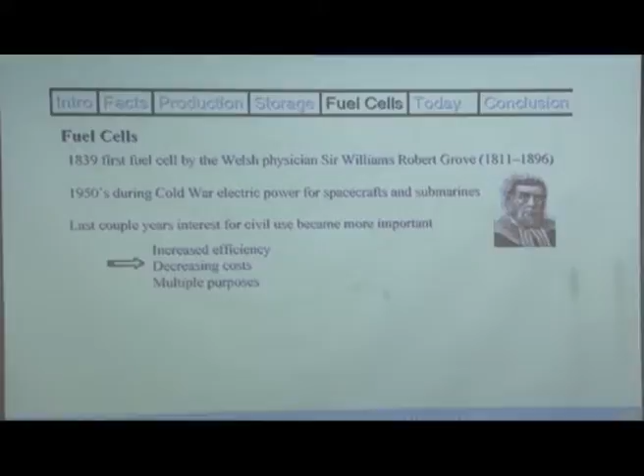In the last decade it became very important because the efficiency of fuel cells has increased and costs have decreased, and multiple purposes have been identified. One of the big pushes for the fuel cell is automotive application, because the automotive sector is so large worldwide. So now people are thinking that we can exploit this technology for this purpose.

What is a fuel cell? A fuel cell is just the reverse of electrolysis. In electrolysis, you have water, you put electricity, you generate hydrogen and oxygen. In a fuel cell, you take hydrogen and oxygen, you combine them, and produce water and electricity - exactly reverse. So it converts hydrogen and oxygen into water and electrical current.

The benefits are that it is a highly efficient process, 40 to 50% efficiency. It does not have noise, there are no emissions of any GHG gas, which will reduce the dependence on fossil fuel.

This is one commercial stack of General Motors. General Motors is at the forefront of developing fuel cells for automotive applications. So this is one such module that has been made by them. There are a few components that I would like to draw your attention to.

Basically, this purple thing in the middle is called PEM, proton exchange membrane. It is a polymeric electrolyte, basically a polymeric film, and on both sides you have anode on one side and cathode on the other. So from one side hydrogen gas flows, from the other side air or oxygen flows.

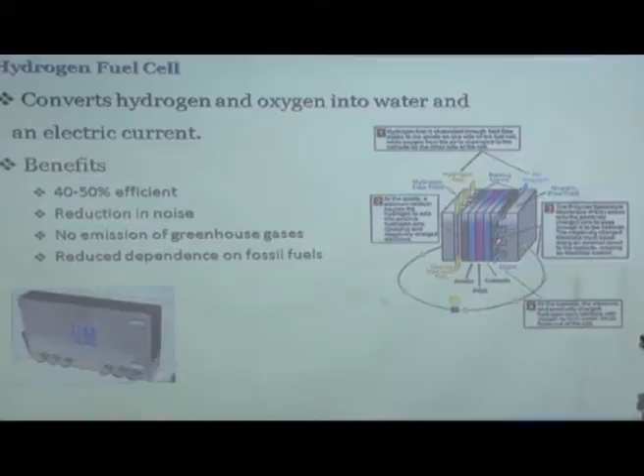Water gets collected, it gets frozen, and once it gets frozen, it will stop the flow. If it stops the flow, everything will stop. So cold temperature performance of the fuel cell is a big problem. It needs some artificial heating, so that the water can remain in liquid form under low temperature ambient conditions. So this is one of the limitations.

Again, this shows here the hydrogen is split into proton and electron. Electrons go out, protons pass through this membrane, come here, and then the electron comes from outside, oxygen is coming - this is also a platinum catalyst - and here water production takes place.

So there is one set of these 5 layers, it is called one stack. It produces about 1 point some volts and maybe about 1 ampere of current, or depending on the size, the ampere can be more or less. So depending on how many volts you want, how much power you want, you make stacks - stacks meaning 1 set, 2 sets, 3 sets - and you put them in series, and then the voltage will increase.

The problem is that one fuel cell is about 1 point some voltage, so it is a very low voltage. The solution is that you stack several fuel cells together, and that way you increase the voltage while keeping the current constant, or if you put them in parallel, the current will also increase.

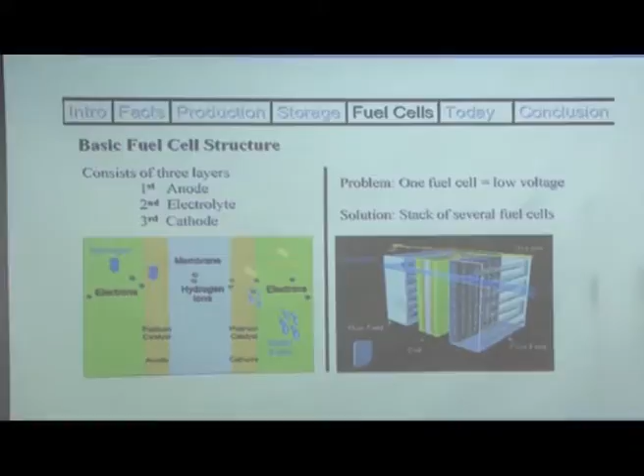So basic chemical reactions are hydrogen plus oxygen gives water. In principle, hydrogen is split into proton plus electron, and at the anode, electrons travel from the anode to cathode, and this is called electric current. When they reach the cathode, they react with oxygen to give O minus ion, and at the cathode O minus combines with the proton coming via the PEM, forming water.

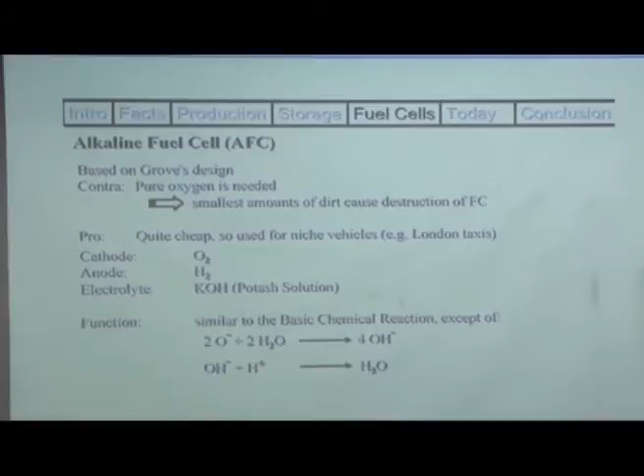Then there are several other types of fuel cells. I think I will skip this since you have understood fuel cells, but I will just mention that there are alkaline fuel cells, where the electrolyte is alkaline, and proton exchange membrane fuel cells, which is the one we just discussed. Then there are phosphoric acid fuel cells, where the electrolyte is phosphoric acid, and many other types like molten carbonate fuel cells, etc.

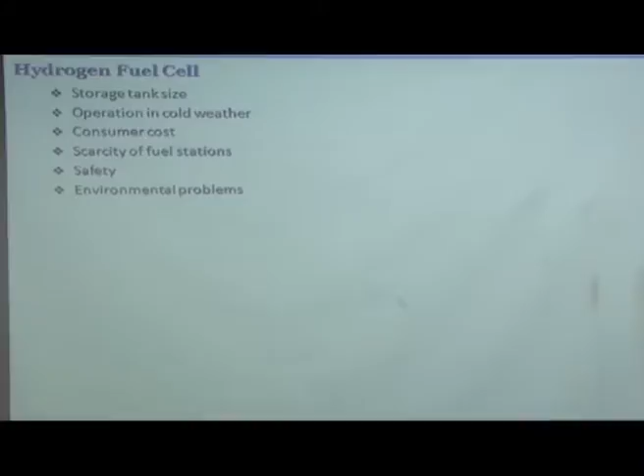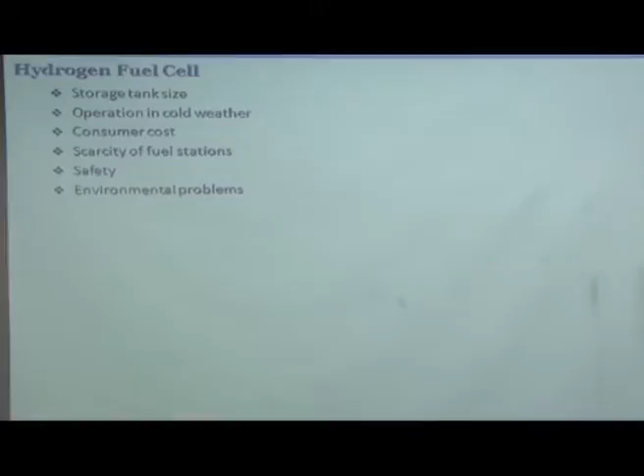When using hydrogen fuel cells, the challenges are: first, tank size, how do you store hydrogen and at what pressure. Second, operation in cold weather, because freezing of the water into ice will take place. Then the cost is very expensive, because you are using platinum catalysts to split hydrogen into proton and electrons, so the cost is very high. There is also a big scarcity of hydrogen fuel stations worldwide, safety concerns, and environmental problems with the materials used in hydrogen fuel cell production.

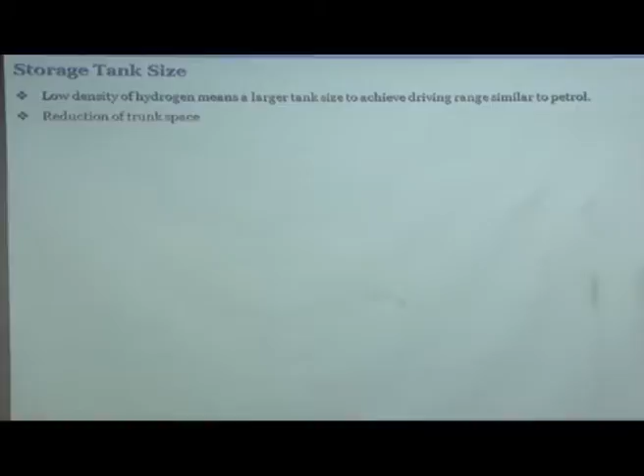Tank size: low density hydrogen means you have to have a higher fuel tank size to achieve a driving range similar to petrol. So if you have bigger tanks, in spite of high pressurization, this will lead to a reduction in trunk size. You will be able to put a lesser number of suitcases in the trunk, very small space will be available.

Cold weather: the fuel cell contains water for humidifying the fuel cell and as a byproduct of the reaction, and the fuel cell needs to reach a critical temperature for full performance. So under low temperature, its performance is always suboptimal.

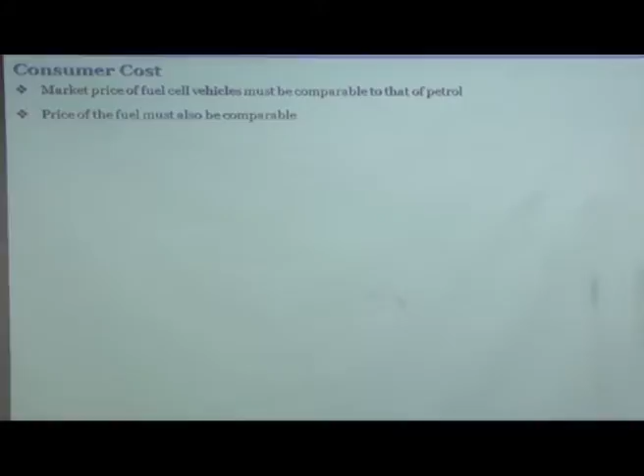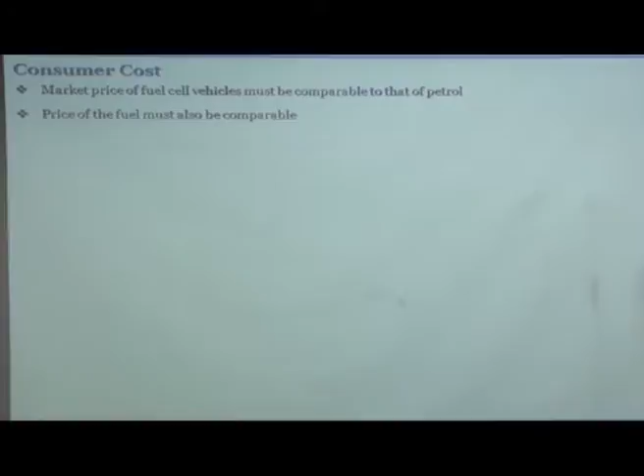Consumer cost: a fuel cell vehicle must be comparable in cost to petrol vehicles, but right now it is about 100 times the cost, making it very expensive. The price of the fuel must also be comparable, only then will a normal customer like you and me buy it. If you are a Hollywood star, of course you do not care about cost, it is more of a fashion statement, and that is what is happening right now. Most Hollywood actors have fuel cell powered cars because when they go to shows, they can show it off. But its penetration in the market for common people is very, very low, because right now it is not really value for the money, though technology keeps evolving.

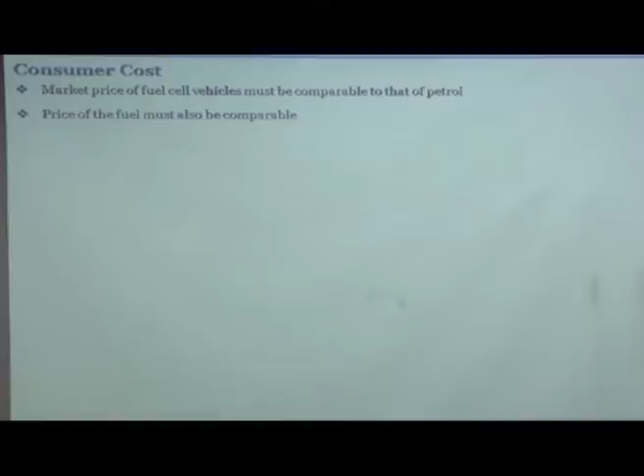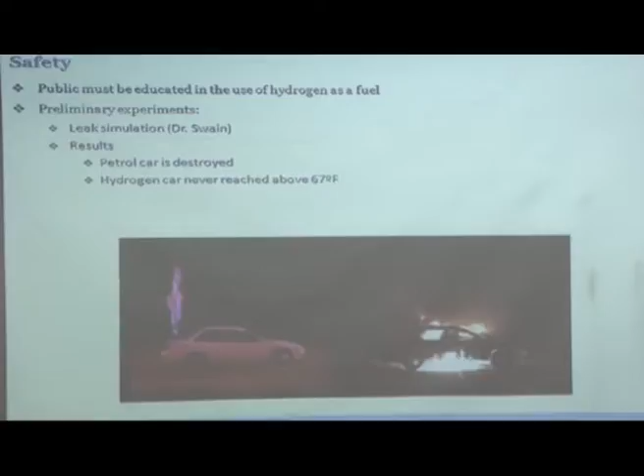Now, the safety issue. I will show you these two cars. The public has to be educated. Right now, safety concerns with hydrogen are more a matter of ignorance, people are not aware of its properties. Once people are made aware of the properties of hydrogen and how safe or unsafe it is, they have to be educated. For example, let me ask you, do you feel fear when you sit in a petrol fueled car about it catching fire or something like that? No. Now here are two cars given. Which one is the petrol car?

This one. What does it show?

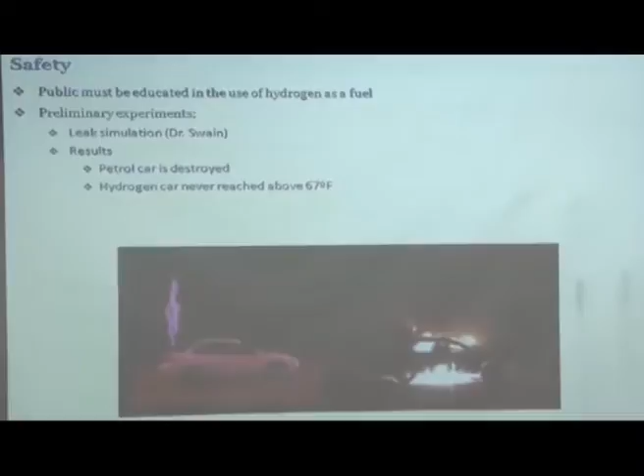So it was a leak simulation test conducted by Dr. Swain. One was a petrol car, the other a hydrogen car, and in both the fuel was deliberately leaked and ignited.

So you can see, if you are sitting in such a car, in no time you will be like Kentucky Fried Chicken. You will be dead, okay.

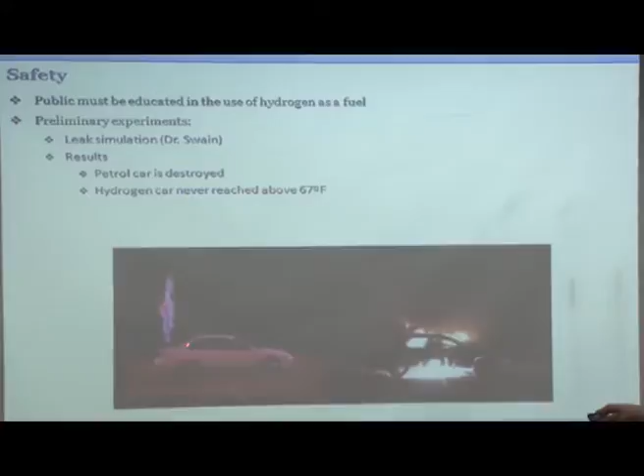Now this is the hydrogen car where the leak is there, but hydrogen has very low density, it rises up very fast, and it has almost invisible flames. The radiation is what causes deaths in fires, because lot of soot is produced, flames become visible and radiate heavily. If the flames are not radiating, nobody gets burnt. Here you see the flames are not radiating, and inside the cabin the temperature never reached above 67 degrees Fahrenheit. You may feel a little hot within tolerable limits, but you will be safe, extremely safe.

So hydrogen is extremely safe, provided you know how to handle it. But if you are inside an enclosed room where there is no place for the hydrogen to escape, of course it will kill you.

When electricity was first invented, with the dynamo, people were so scared, wondering what kind of technology had been created that could give you a shock. Now you are not scared to ask your 3-year-old son to switch on or off a fan or a light. It has become so safe. So people have to be educated about the safety of hydrogen. But there are some historical reasons too, which I will talk about a little later.

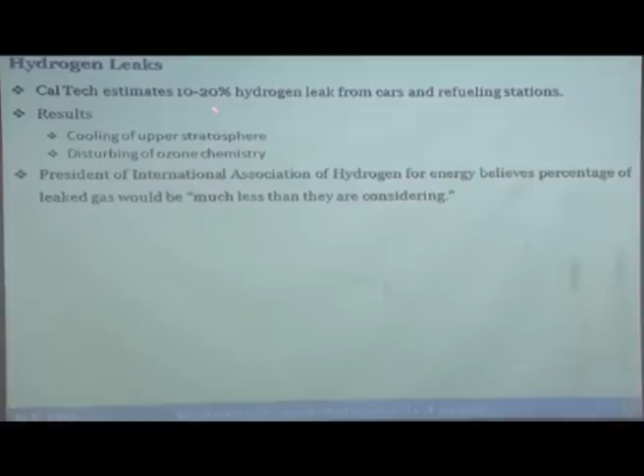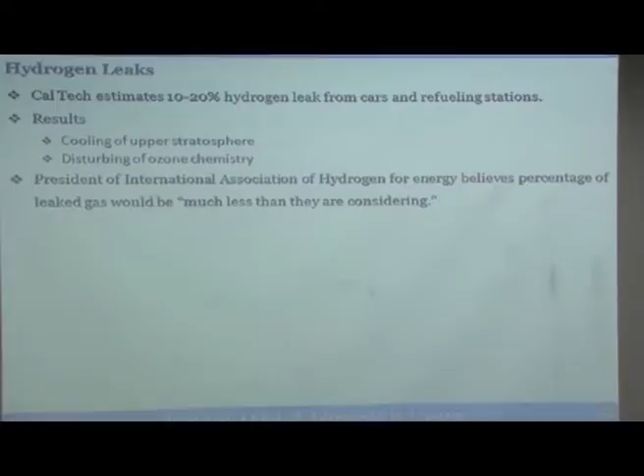Caltech estimated that 10 to 20% hydrogen leaks from cars and refueling stations will take place. This happens because hydrogen is a light material with small molecules that may penetrate through the tank. When they rise into the atmosphere, they may lead to cooling of the upper stratosphere and disturb ozone chemistry, if implemented at a very large scale for the entire transport sector.

But the president of the International Association of Hydrogen Energy believes that this 10 to 20% figure being talked about will be much less than what they are considering. So there are debates about the environmental impact as well.

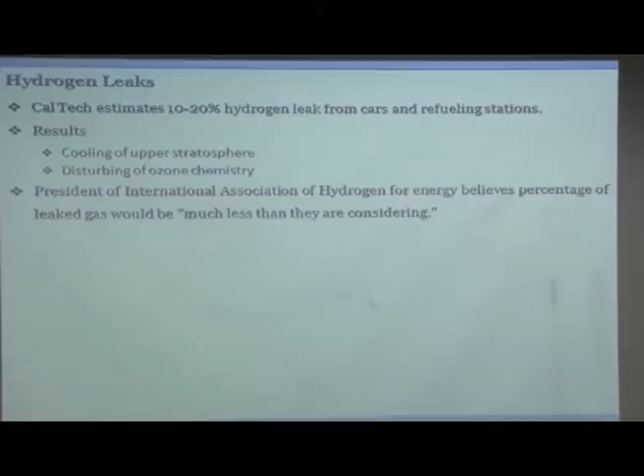Two types of hydrogen engines exist: a fuel cell or a hydrogen IC engine car. The main difference is that fuel cells are more expensive and hydrogen engines are cheaper. So if you want to afford one right now, you can afford a hydrogen IC engine car. Maybe 10 years down the line, if you have a very successful startup and make a lot of money, you can buy a fuel cell car. But right now, maybe go for a hydrogen IC engine car.

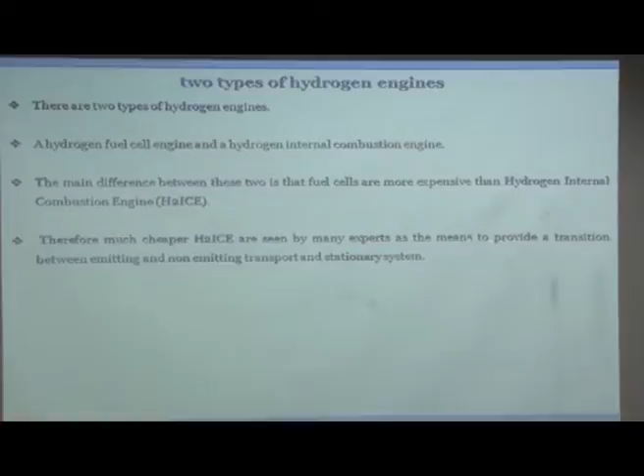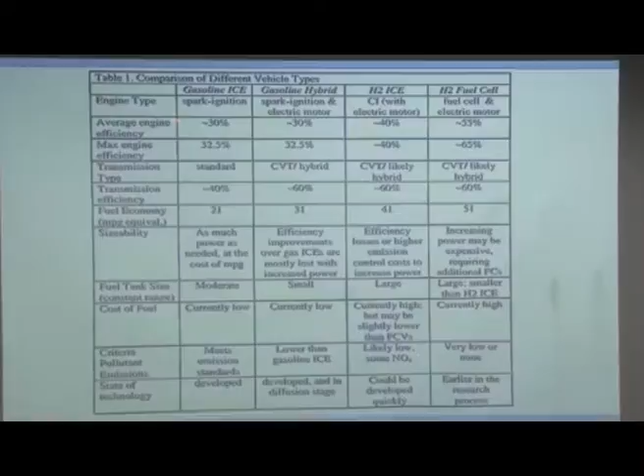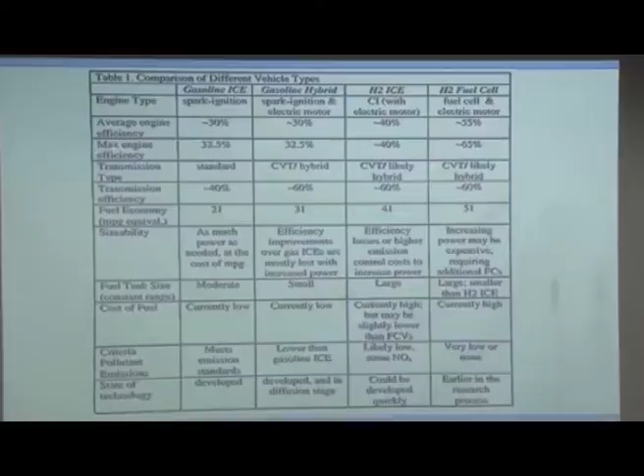Therefore, much cheaper hydrogen IC engines are seen by many experts as the means to provide a transition between emitting and non-emitting transport and stationary systems. This gives a comparison between different types of vehicles - gasoline IC engine, gasoline hybrid, hydrogen IC engine, and hydrogen fuel cell - across parameters like engine type and average efficiency. You can see hydrogen IC engines are more efficient than both gasoline types, but fuel cells are even more efficient. Maximum engine efficiency is highest for fuel cells, transmission efficiency is good, and fuel economy in miles per gallon equivalent is poor for gasoline IC engine, much better for gasoline hybrid, even better for hydrogen IC engine, and best for fuel cell.

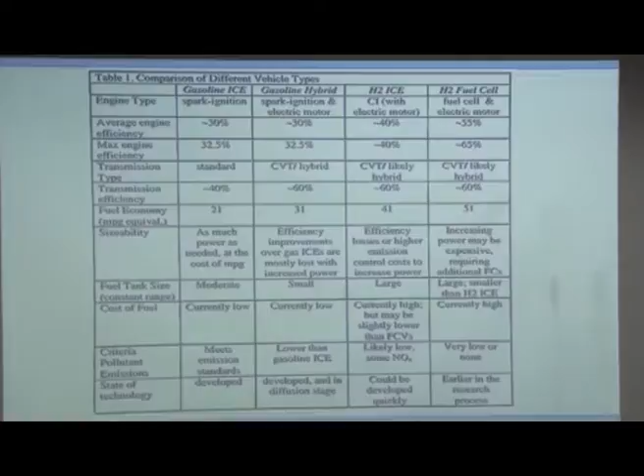Now let us look at the configuration of the fuel cell vehicle. You have fuel, which is hydrogen in this case, and the fuel cell generates electrical power, which then goes to the power conditioner that charges the batteries.

So, electricity will flow between the battery and the power conditioner depending on whether the need is more or the production is more, and then from the power conditioner the electricity is provided to the accessories, and then it will also be given to the drive motors.

Drive motors work both ways. When you want to accelerate, it will drive the wheels. When you are braking, the drive motor acts like a generator and generates electricity which is finally stored in the battery. So regenerative braking is one of the big plus points of such vehicles. This is the basic vehicle configuration at a very high level.

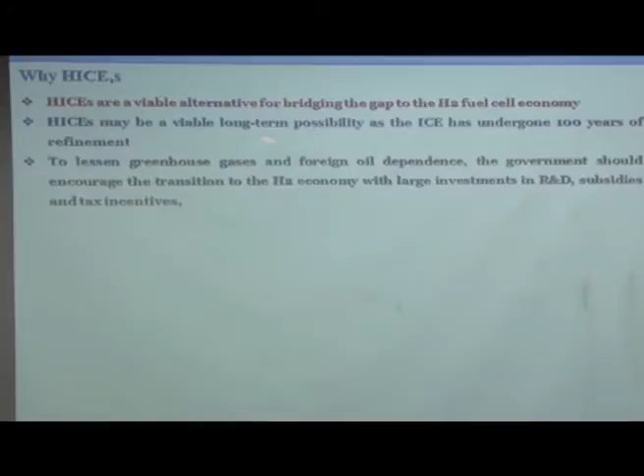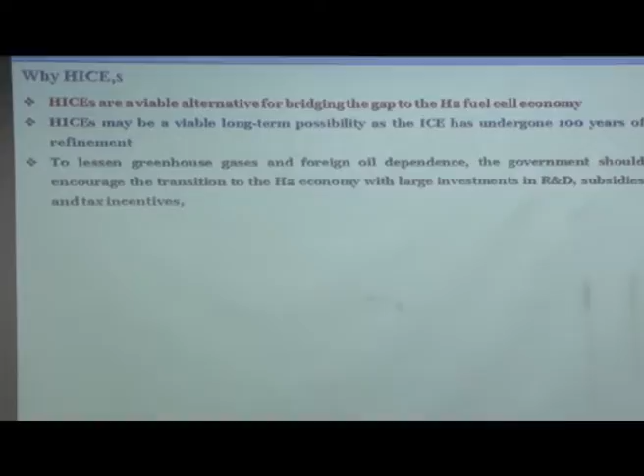Hydrogen IC engines are a viable alternative for bridging the gap to the hydrogen fuel cell economy, and hydrogen IC engines have gone through 100 years of refinement. We basically want to reduce dependence on foreign oil and greenhouse gas emissions. Therefore, a lot of incentive is being given to develop hydrogen fuel vehicles all over the world.

Some history: electrolysis was first done in 1800, then hydrogen IC engines were proposed even before other IC engines were developed, in 1820. In 1874, Jules Verne wrote a novel where he said that hydrogen, or water, would be the coal of the future.

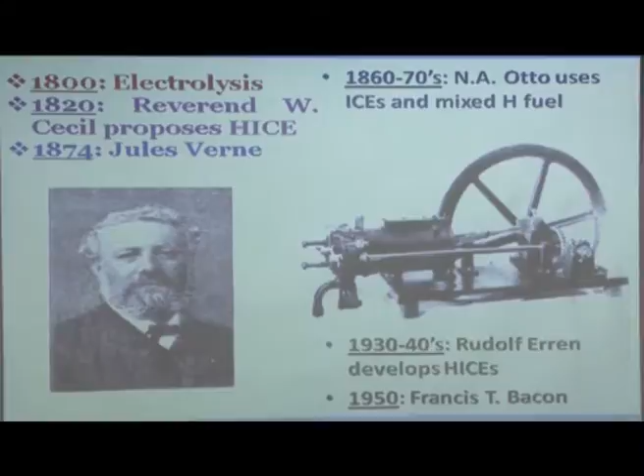In the 1860s and 70s, Nicholas Otto used an IC engine mixed with hydrogen fuel. There was an accident when he was using this, and he almost died. He was very badly injured in that accident with hydrogen fuel.

In the 1930s and 40s, Rudolf Erren developed the hydrogen IC engine successfully, and there was a lot of work done by Francis Bacon in the 1950s.

Everything was fine, a lot of work was being done on hydrogen, people were running and developing hydrogen engines, and people were flying zeppelins, airships, between Europe and America, all fueled by hydrogen as well. Hydrogen was not a taboo at that time, but then one fine day Hindenburg happened.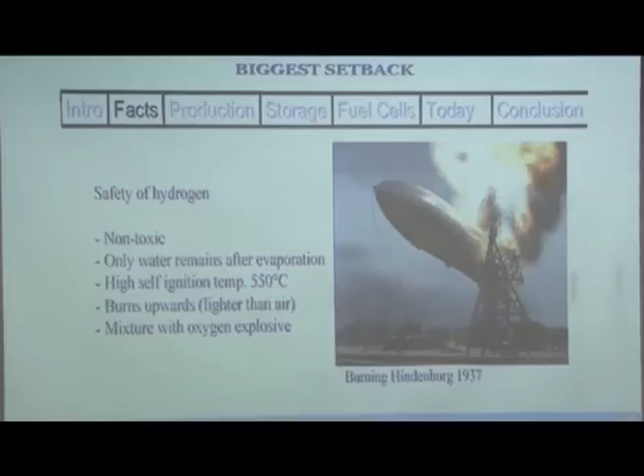This was an airship on which people traveled from Europe to America. You can see ropes, people there, about 100 people on board this ship. It used to be like a flying 5-star hotel, you could cook, sleep, and it was not as congested as our airplanes of today, it was much bigger, and it used to fly at slow speed, like 50-60 kilometers an hour. So people would take about 7 days going from America to Europe or the other way.

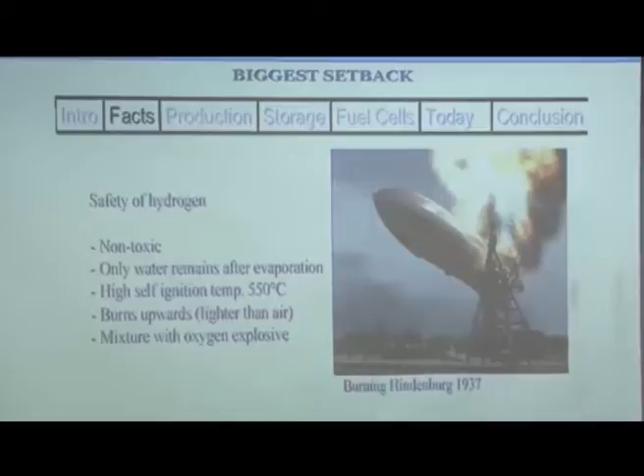It was landing, which means you really have to pull it down by ropes, and suddenly a lightning strike took place. This thing was fueled by hydrogen, so within a matter of seconds the whole thing got burnt, and all 100 people on board died. This happened in 1937.

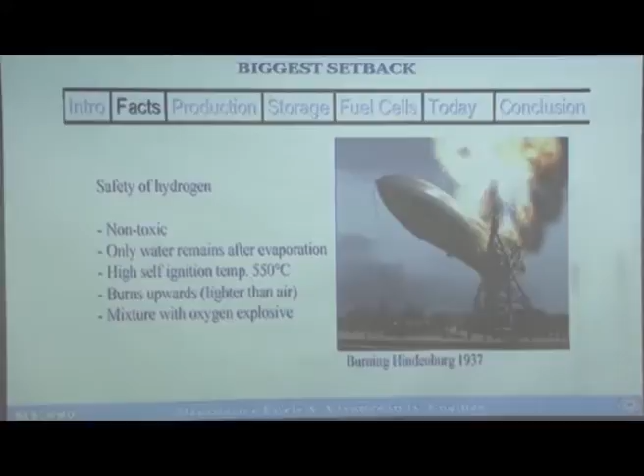The blame was put on hydrogen, that people died because of the hydrogen, and after that hydrogen became a monster. Nobody touched it, nobody even did research on hydrogen for the next 20-30 years, because once an accident happens and you blame it on a particular fuel, nobody wants to do that research. Government funding stops, private entrepreneurs stop funding. How do you do research then? So this was a black day in the history of hydrogen, and it stopped all the activities.

Later on, some forensic experiments were done, and it was figured out that the paint on the surface was flammable. So when the lightning strike took place, it was the paint and the structure that got burnt first, and hydrogen had really nothing to do with this accident. But that was discovered maybe 10, 15, 20 years back, so the damage was already done.

As I said, after that the research completely stopped, only sporadic efforts remained, very few agencies were involved in research. Some research here and there continued, but mostly people looked at hydrogen as a very bad fuel. I'll tell you about some of those research efforts. In fact, because of the Hindenburg, we are not driving hydrogen cars today. If Hindenburg had not happened, I am sure we would have been driving hydrogen cars for at least 20 years now.

After that, as I said, it was only the military which was involved in hydrogen vehicle research. In 1943, Air Force of America investigated liquid hydrogen fuel for Air Force propulsion.

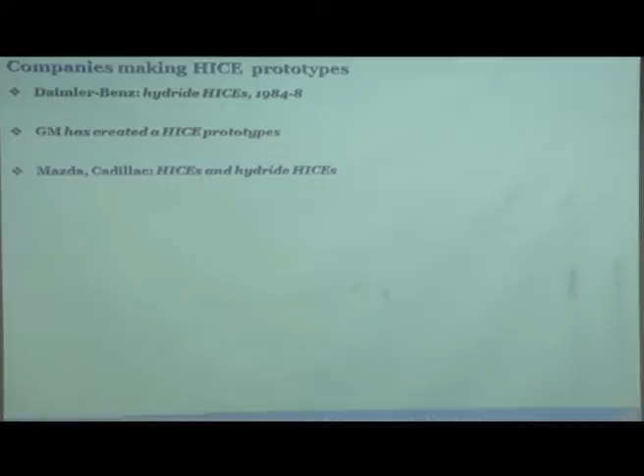Somebody wins, and people look at what technology they have used, and maybe try to replicate it in production. This culture right now does not exist in our country, but it is slowly coming, because now in India also we have started taking student competitions more seriously.

This is one of the big ways of developing new technology, and it is being exploited very, very effectively by the US government and US automotive companies who hunt for technology in such competitions.

There are many companies that started making hydrogen prototypes. Daimler-Benz prepared a metal hydride based hydrogen IC engine car in 1984, 1988. General Motors also created a hydrogen IC engine prototype. Mazda, Cadillac hydrogen IC engine and hydride hydrogen IC engine cars were also developed.

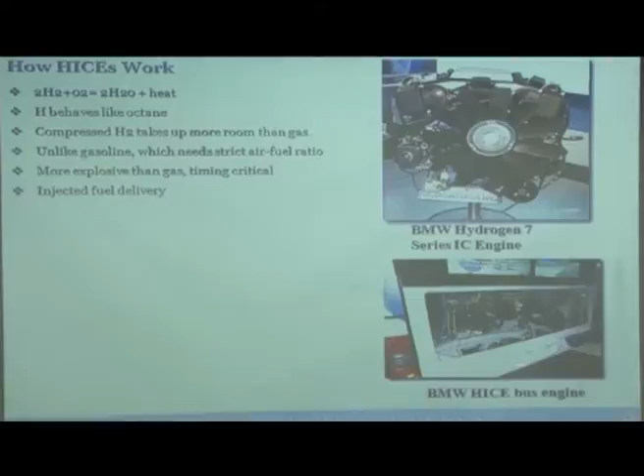This is just a hydrogen IC engine, and this is what is fitted inside the bus made by BMW. So there is a lot of research going on as far as hydrogen is concerned.

Now, if you look at hydrogen, there could be several ways. One is that you can use 100% hydrogen in the car in spark ignition mode. You can have hydrogen supplementation, that means some energy coming from petrol, some energy coming from hydrogen. You can have mixtures of hydrogen and CNG.

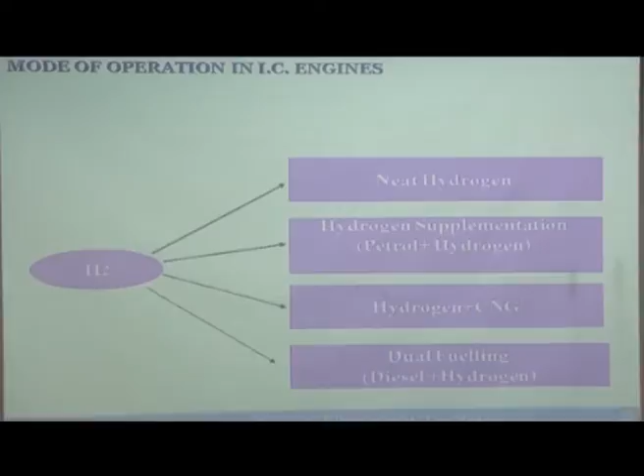A lot of research on hydrogen CNG mixtures is done in IIT Kanpur Engine Research Lab, especially on laser ignited hydrogen and enriched CNG engine development. We are the first in the world to develop an HCNG laser ignited engine in automotive size. Dual fueling, diesel and hydrogen supplementation, is also one technology for using hydrogen in engines.

If you look at the storage of hydrogen on board, as I said, metal hydrides are special alloys that incorporate hydrogen atoms in their crystalline structure. Hydrogen is released when heat is applied to these alloys.

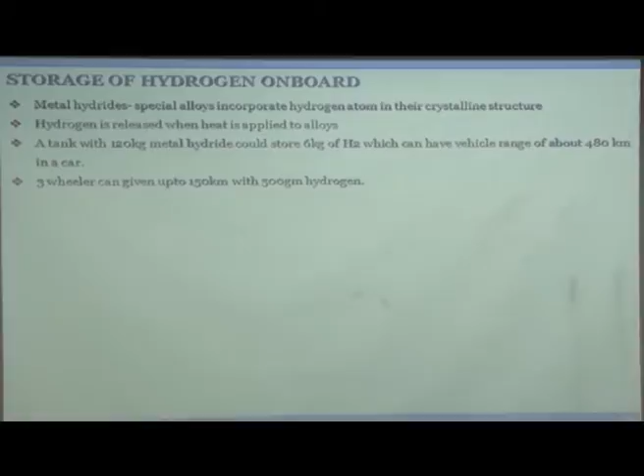I told you that the metals are heavy. So just to give you a comparison of weights, a tank of 120 kilograms of metal hydride will store 6 kilograms of hydrogen, and this 6 kilograms of hydrogen will give your car a range of about 500 kilometers. That is pretty good, but still its weight will be 125 kilograms.

Compare it with gasoline. This kind of range will be given by 35 liters of gasoline, and the tank will be about 15 to 20 kilograms. So about 55 kilograms of weight with gasoline can take you 500 kilometers. In case of hydrogen, it is 75 kilograms extra, although the fuel consumed is only 6 kilograms.

Three-wheelers are of special interest to India. There are many three-wheelers developed by IIT Delhi which are running very successfully at Pragati Maidan. So next time you go to Pragati Maidan for an exhibition, you can see the three-wheelers.

There are about 10 three-wheelers developed by IIT Delhi which are fueled with hydrogen. They use very small cylinders of half a kilo, and this half-kilo cylinder is good enough to take the three-wheeler for 150 kilometers. That's a pretty good thing, and a half-kilo cylinder of hydrogen is not very big.

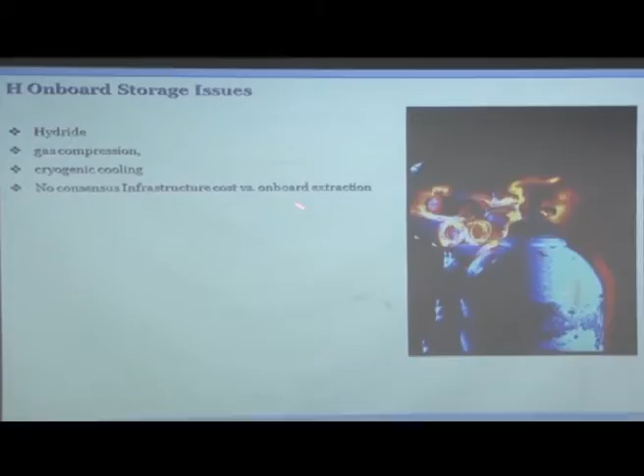As I said, you can go for metal hydrides, compressed hydrogen, or cryogenic cooling, but there is absolutely no consensus worldwide because of infrastructure cost and onboard extraction issues. I will discuss a little bit about metal hydrides.

In the 1960s there was a lot of research and development done in the US and Netherlands on metal alloys, which adsorb hydrogen at high temperatures and pressure.

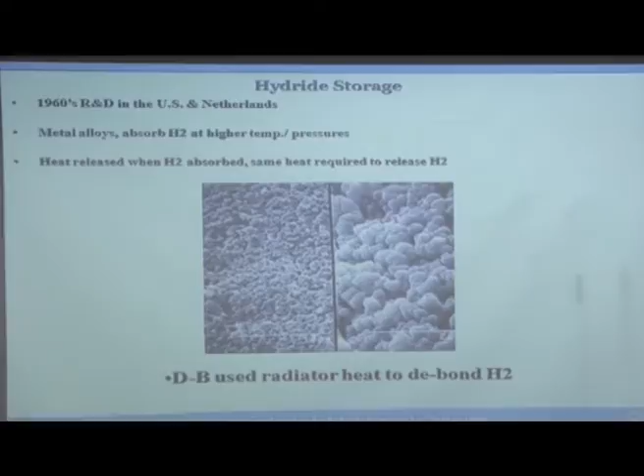Hydrogen is released, and heat is released when hydrogen is absorbed; the same heat is required to release the hydrogen. So when you are putting the hydrogen in, heat will be released—it is an exothermic process, and you need to remove that heat. When you want to release the hydrogen, you have to provide the same amount of heat.

Now, when you want to use it in the engine, you have to desorb it, and in order to desorb you have to give it heat. That heat comes from a high temperature source. What is the free high temperature source inside the engine or vehicle? It is the radiator—lots of heat is available there. So you put the heat in, and for this, in the metal hydride tank you have to make some coils which take the cooling water and heat it. When heated, the metal hydride will dissolve the hydrogen, and then high pressure hydrogen comes out and goes out of the tank. Clear?

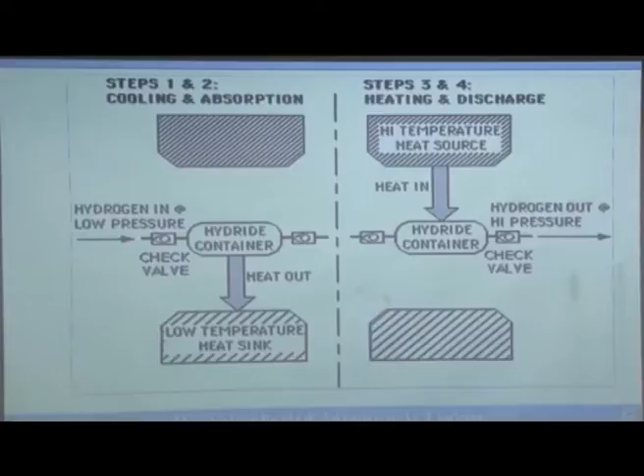The advantage is that hydrogen does not take any extra room—whatever volume the metal hydride has remains the same, it does not occupy extra space. Hydrides can carry more energy per unit volume than liquid hydrogen, and 2.2 times more than compressed hydrogen at 5,000 psi, which is around 350 bar. So metal hydride is actually the most dense storage of hydrogen—more dense than liquefied hydrogen, more dense than compressed hydrogen.

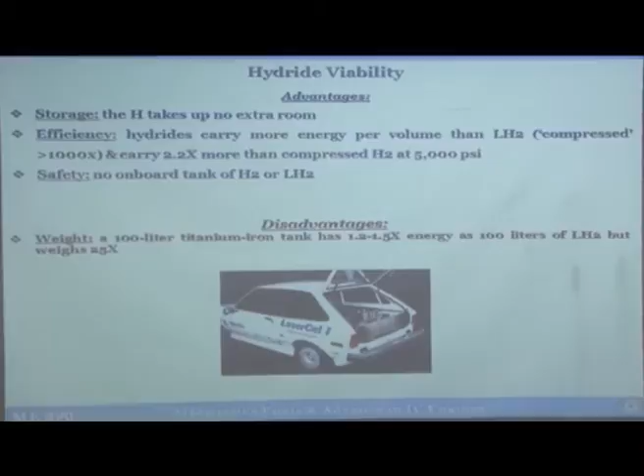In terms of safety, it is absolutely safe, because there is no compressed tank of hydrogen, no liquid hydrogen. Even if your tank gets ruptured, it will not lead to spilling of hydrogen. Hydrogen will itself not dissolve out, because it has to be heated in order to be released. So if you have a piece of metal hydride in your hand with hydrogen adsorbed to it, there is no way you can release that hydrogen unless you heat it. So it is very safe.

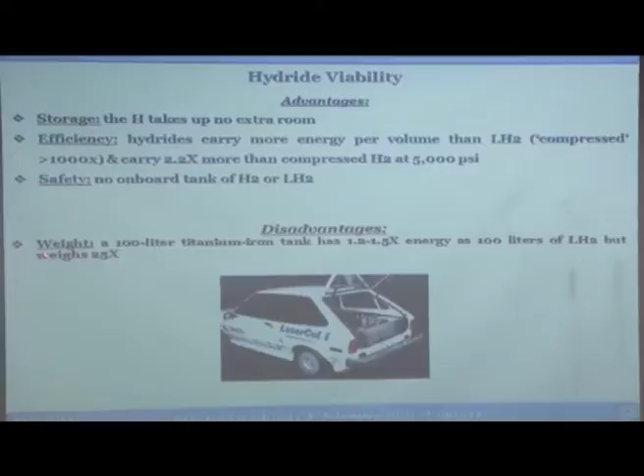The disadvantage is that a 100 liter titanium iron tank has 1.2 to 1.5 times the energy of 100 liters of liquid hydrogen, but weighs 25 times more than liquid hydrogen. So the weight is going to be very, very heavy.

The disadvantage is that backfire and engine knock are problematic, and it can sometimes lead to disasters. Despite extreme pressures, compressed tanks occupy so much space that they are only practical for buses or vans, where rooftop space is available. These are not practical for cars, and two-wheelers are also difficult.

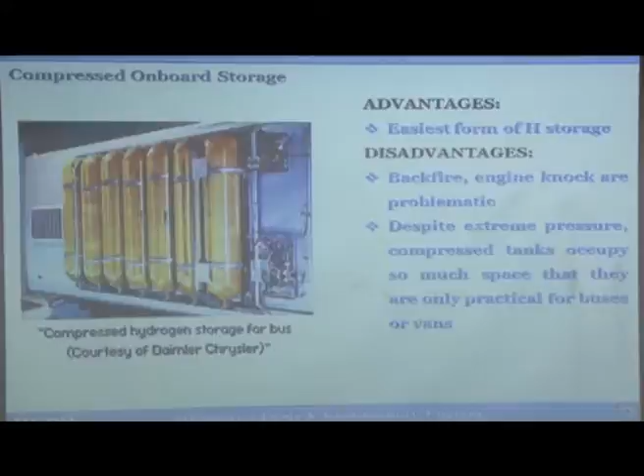There is a lot of work done at Musashi Institute of Technology, and it requires an extremely pressurized tank to keep it in liquid form. So you have to pressurize it, and also make it highly insulated. A BMW has been in operation since 1990, equipped with an aluminum alloy tank that carries a capacity of 120 liters of liquid hydrogen.

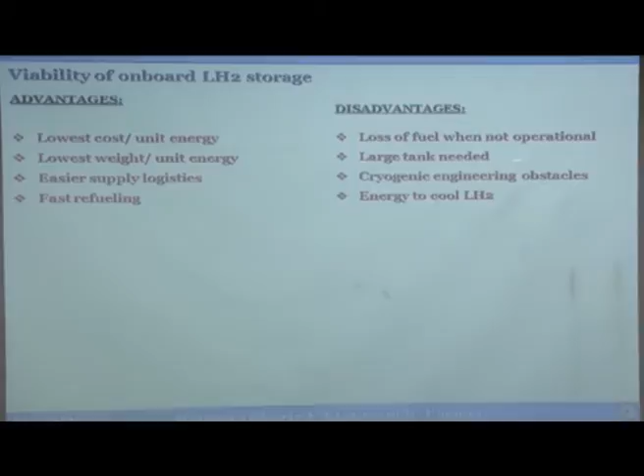So the advantages of liquid hydrogen storage are lowest cost per unit energy, lowest weight per unit energy, easier supply logistics, and fast refueling. The disadvantage is loss of fuel when not operational, because heat transfer takes place, and once that happens, pressure increases, it vaporizes, and has to be flushed out into the atmosphere. Also, large tanks are required because storage density is very low.

Cryogenic engineering obstacles exist because you have to cool it down to minus 250 degrees Celsius, and the energy required to convert it to liquid is about 40%.

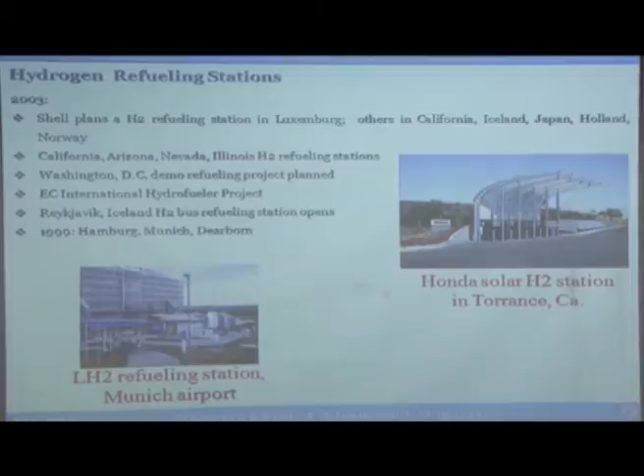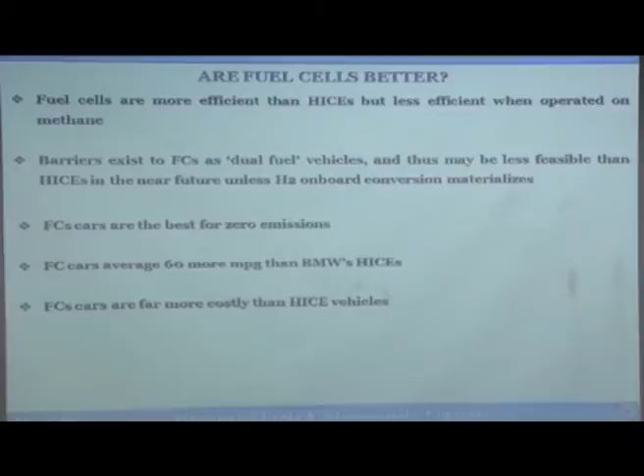Hydrogen fueling stations are being set up because hydrogen cars are becoming popular, even though the numbers are still very small. Now the million dollar question people ask is whether they should go for a hydrogen IC engine car or a fuel cell car, because as the numbers look, fuel cell looks more efficient, but they are also more expensive. What should they do? This is still an unresolved question.

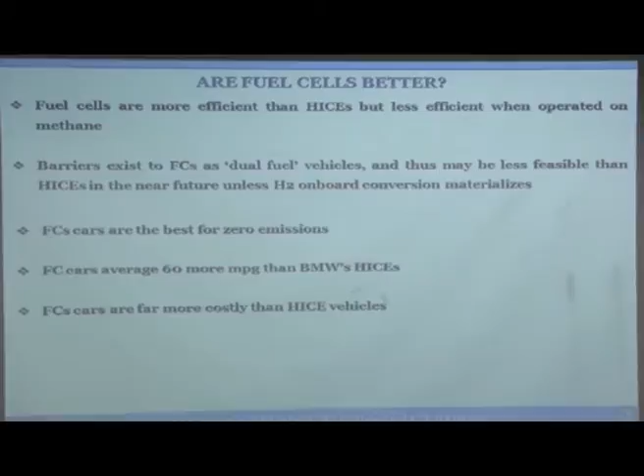Fuel cells are definitely more efficient than hydrogen IC engines, but they are less efficient when operated on methane. Barriers exist to fuel cells as a dual fuel vehicle—if you run out of hydrogen, you have to tow your car. Whereas if you run out of hydrogen in an IC engine car, you can switch to gasoline and continue your journey. So this is one big plus.

Fuel cell cars are best for zero emissions; there is no emission coming out. In hydrogen IC engine cars, although practically hydrogen plus oxygen gives water, this reaction takes place at very high temperature, so the atmospheric oxygen also reacts with atmospheric nitrogen. So the only harmful pollutant that comes out of a hydrogen IC engine is NOx. That NOx formation does not exist in fuel cell cars, so hydrogen IC engine cars cannot be called zero emission, because they have some NOx emission.

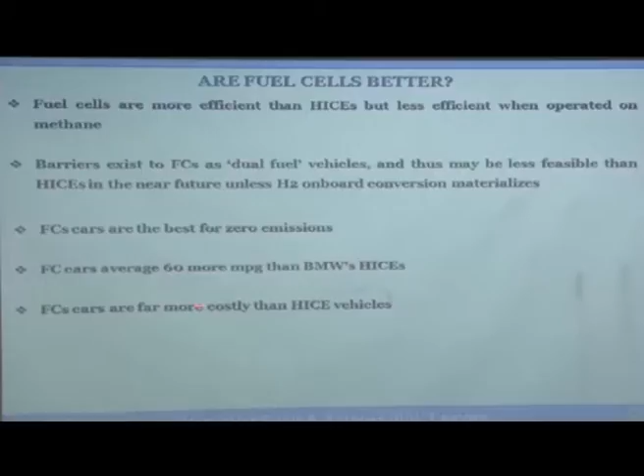Fuel cell cars average 60 more miles per gallon than BMW's hydrogen IC engine cars. Fuel cell cars are far more costly than hydrogen IC engine cars. So they are more efficient, but much more expensive.

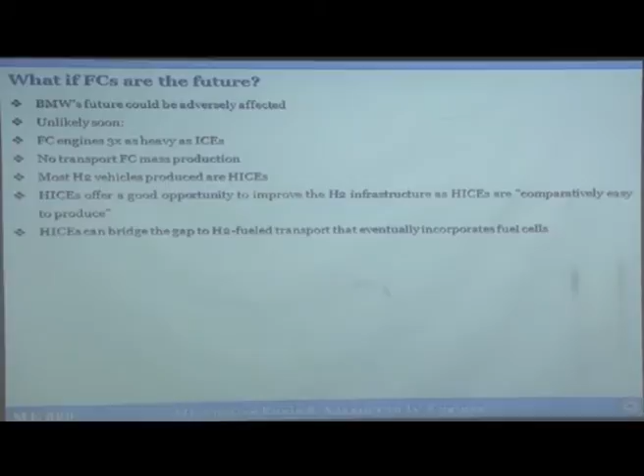So if fuel cells are the future, you see every company has made their own choice—each company is working on one technology, not all of them, because hydrogen volumes right now are very small. For example, BMW has said they will go for hydrogen IC engine cars and use liquid hydrogen only. Similarly, some other company is saying they will go only for fuel cell cars. So if fuel cells are the future, BMW, which has invested in liquid hydrogen, could have their future adversely affected. But that is very unlikely.

Fuel cell cars are three times heavier than IC engine cars, because the fuel cell stacks are very large, and storage also is large. There is no mass production of fuel cells anywhere in the world as of now, and most hydrogen vehicles produced today are hydrogen IC engine vehicles.

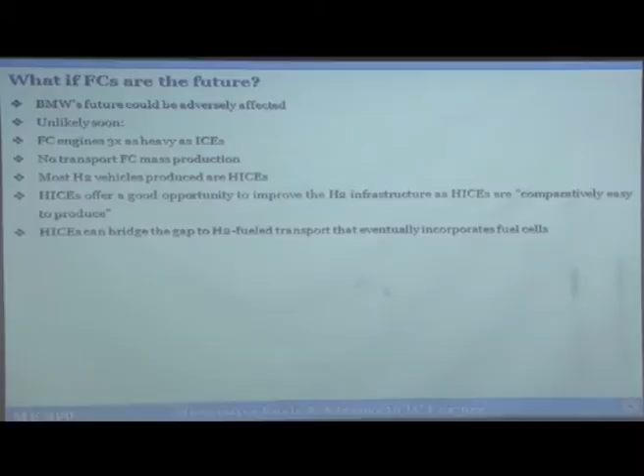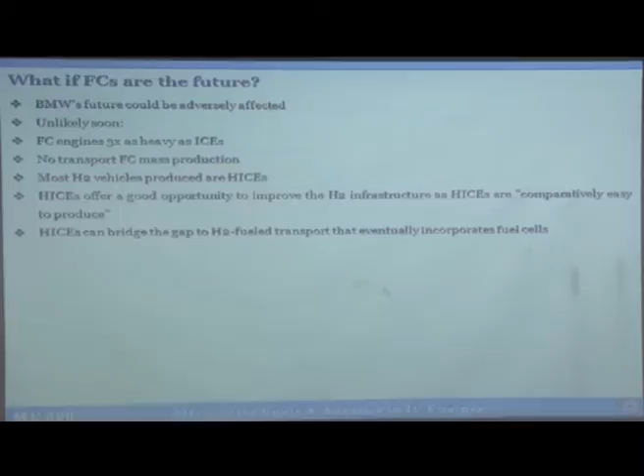Hydrogen IC engines offer a good opportunity to improve hydrogen infrastructure, as they are comparatively easy to produce compared to fuel cells, and can bridge the gap in hydrogen fuel transport that will eventually incorporate fuel cells. So the way we see it, if you want to transition into a hydrogen economy, first we should focus on hydrogen IC engines, get a lot of cars running on them, and as that happens, distribution networks and fuel pumps will come, infrastructure will be created, and by that time it will give enough time for fuel cell manufacturers to come up and fuel cells to become cheaper. Once they're cheaper, fuel cells can start coming in and more efficient cars will be produced.

Fuel cell is a very costly technology, about 10 times hydrogen IC engine. It will take at least 10 years to become affordable.

Hydrogen can be used in existing engines because it's an established technology, and it will require only some modifications in tooling to adapt it to hydrogen as a fuel.

Hydrogen is a clean burn fuel. It gives only NOx emissions, and that also can be minimized. So we can minimize it. It's not that it is a big problem. And if we are not able to minimize whatever is coming out, we can also take care of it by exhaust gas after treatment. It's a standard technology.

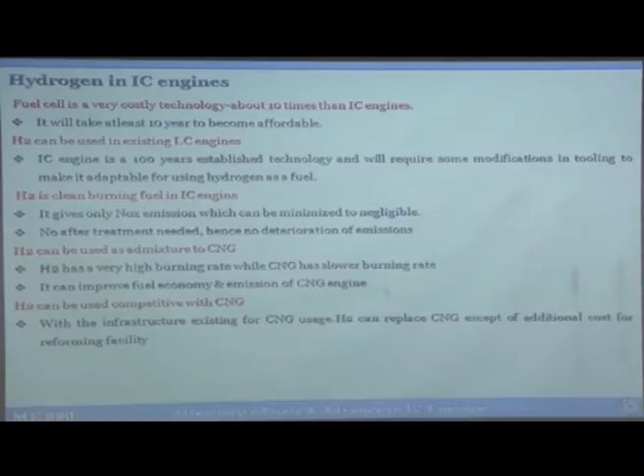Hydrogen can also be used as admixture. So one of the first things that India is looking forward to is that, in India, what we are saying is we have a very good network of CNG. And once you have a very good network of CNG, you mix a little bit of hydrogen.

If you compare the flames of CNG with flames of gasoline, the CNG flames are much slower. Hydrogen flames are very fast. So what we are thinking is that if we blend say 10% or 15% by volume of hydrogen with 85% by volume CNG, then it will be called HCNG. HCNG is hydrogen enriched compressed natural gas, and this mixture, when it is burnt in the engine, its flame speed will be very similar to gasoline. So the performance of the CNG engines will improve.

CNG engines, there are a lot of CNG engines in this country. We have cars, a lot of cars available, which are commercially dedicated engines. We have a lot of buses available. We have generators available on CNG. All of those engines will not require any modification at all if we start blending 10 to 15% hydrogen. So, I think this is one of the opportunities India has, that we replace CNG with HCNG mixtures and take one step, one baby step, in the direction of a hydrogen economy.

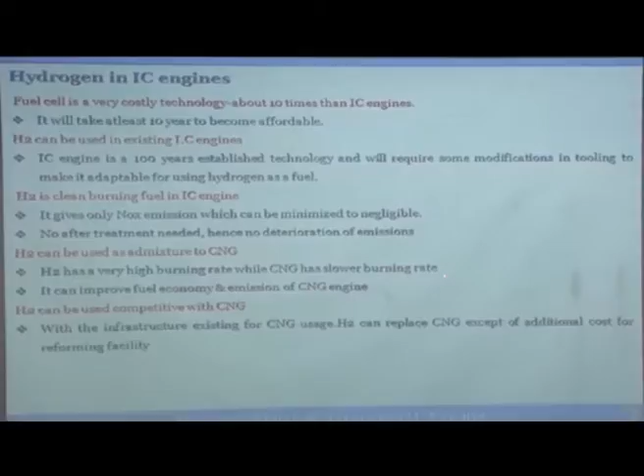So, hydrogen has a very high burning rate, while CNG has a slower burning rate. It will therefore improve the fuel economy and emissions from the CNG engine. So, hydrogen can also be used competitively with CNG. With the infrastructure existing for CNG usage, hydrogen can replace CNG except for the additional cost of reforming facilities.

Now, I think in order to answer many of these questions that you may have in your mind, it is best to look at the property tables very carefully. Whenever you are talking about a new fuel, it is very, very important that we look at the property table very carefully. It will tell us what kind of technology we should use, what kind of technology will succeed. So, let us look at this property table of hydrogen, methane and gasoline. This is on several pages, so I will explain each one of them carefully.

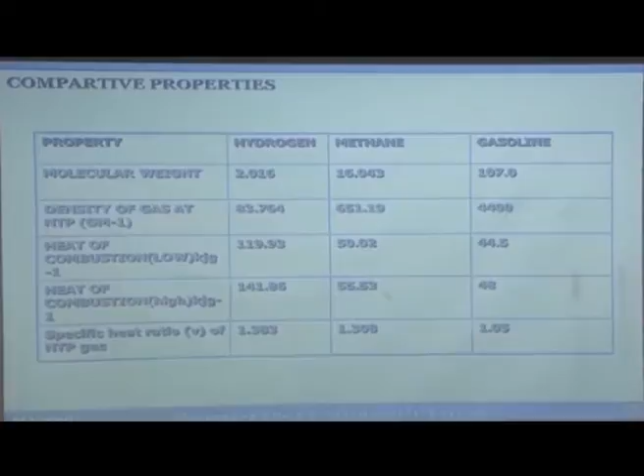Molecular weight is 2 for hydrogen, methane is 16, and gasoline we have considered to be isooctane or some variation of isooctane, so 107, 108, 110, something like that. So, you can see that at normal temperature and pressure, hydrogen vapors will have very low weight. Methane will have higher weight, and gasoline, of course, will have much higher weight.

Density of the gas at normal temperature and pressure is 83.764 grams per meter cube for hydrogen. This is 651.19 grams per meter cube for methane, and this is 4,400 grams per meter cube for gasoline when you make vapors.

Heat of combustion, that means we are talking about lower calorific value, is 120 megajoules per kilogram for hydrogen. This is 50 megajoules per kilogram for methane, and this is 44.5 megajoules per kilogram for gasoline. This is higher calorific value: 141 for hydrogen, 55 for methane, 48 for gasoline.

Specific heat ratio Cp by Cv is 1.383 for hydrogen, 1.308 for methane, and here it is lower for gasoline. So, Cp is almost equal to Cv.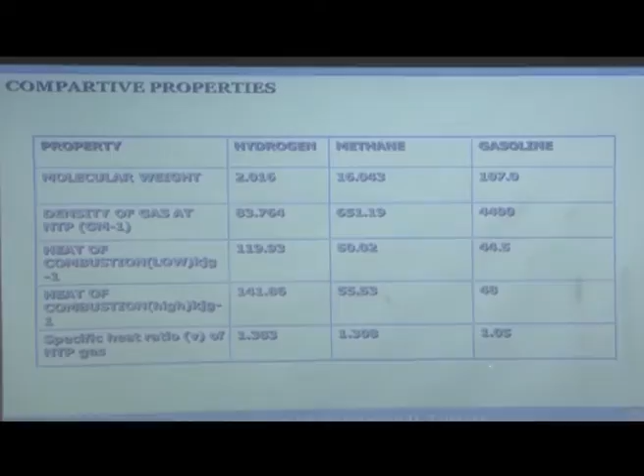Burning speeds: hydrogen is 265 centimeters per second at NTP, methane is about 10 times lesser, and gasoline is a little faster than methane. So, when you mix these two, you are going to increase the speed, and once the speed increases, your thermodynamic cycle comes closer to the ideal cycle. So, the efficiency increases.

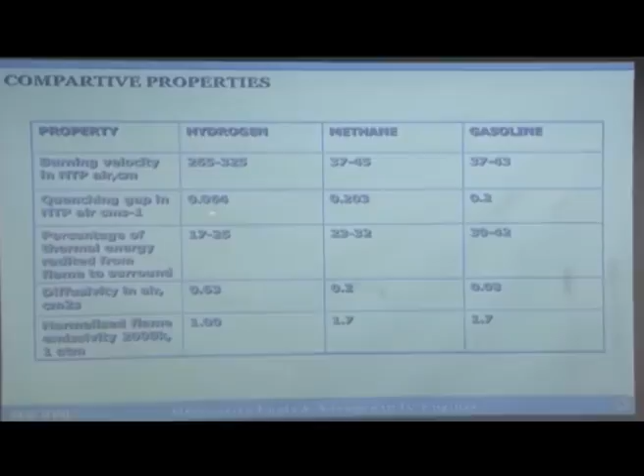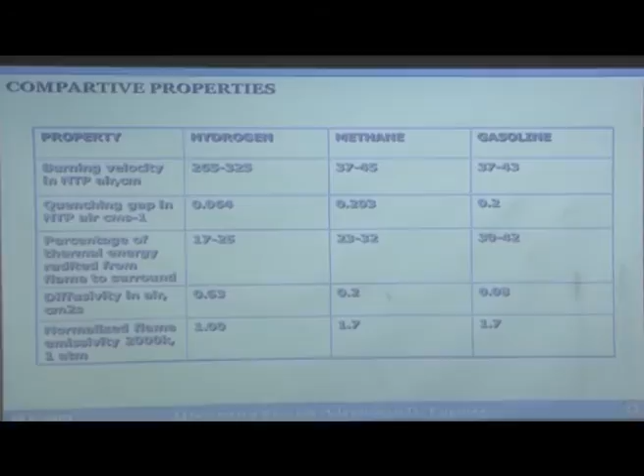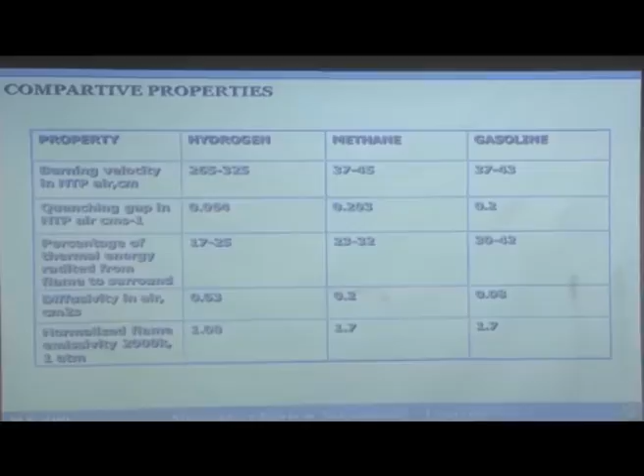From that small opening, when it reflects back, the flames can go into the manifold if the quenching gap is very small. So hydrogen flames can actually penetrate from the cylinder to the manifold and cause explosion there, which is undesirable. This quenching gap is larger in gasoline or CNG engines, so it doesn't happen there. So when designing a hydrogen engine, you have to ensure the quenching gap does not lead to backfire in the manifold. You have to put some protection, so some design changes in the valve or valve seat are required.

This shows the percentage of thermal energy radiated from flames. As I told you, hydrogen is almost flameless, so only 17 to 25% of thermal energy is radiated to the surrounding. Methane is 23 to 32%, and gasoline is the highest.

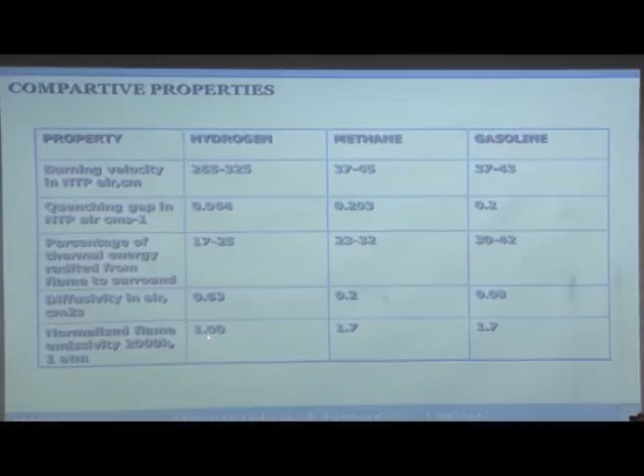Diffusivity in the air, please look at this table. Gasoline is 0.08, very low, very poor diffusivity. Methane is a little better, and hydrogen has extremely high diffusivity. So if hydrogen comes out in the air, it will very quickly form a homogeneous mixture.

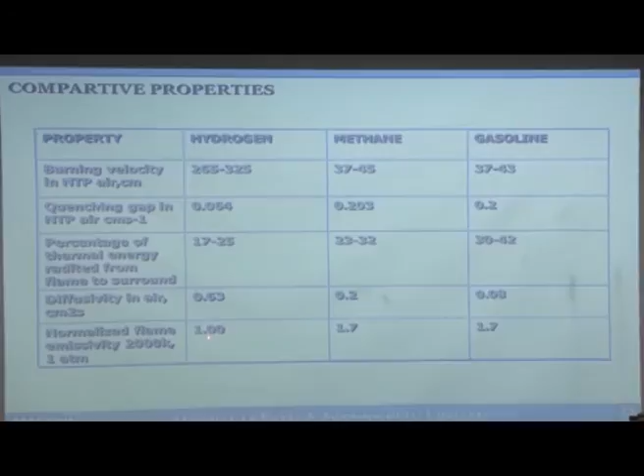Normalized flame emissivity is 1, 1.7 and 1.7. Limit of flammability: methane is 5 to 15 volume percent. In case of gasoline vapors, it is 1 to 7.6 volume percent. These are safe fuels with a very narrow flammability range. Hydrogen is 4 to 75%, which means any mixture will be flammable.

So good in some sense, if you make any mixture with hydrogen, it will burn and the engine will not misfire. But bad, because if accidental leakage takes place, any mixture will be combustible. So inside the engine this is desirable because it avoids misfire. Outside, if leakage takes place, any mixture will be able to cause an accident. So it is related to the safety issue.

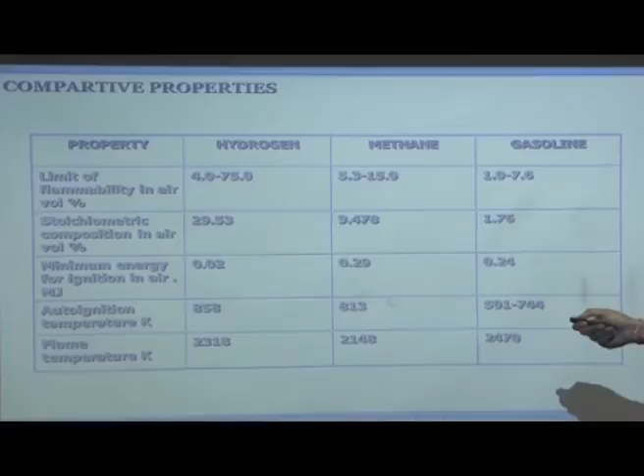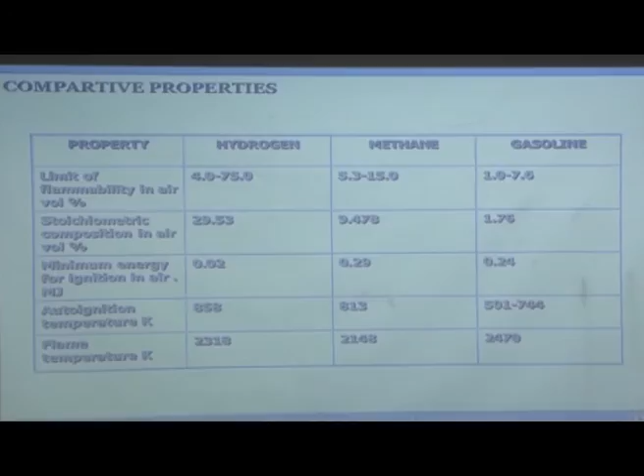Stoichiometric composition: when you make a stoichiometric mixture of fuel and air, gasoline vapors will occupy only 1.76% of the space, with 98.24% occupied by air. For methane it is 10%. That means if you make a stoichiometric mixture, you will immediately feel that engine power has reduced - the engine has got derated, not producing the same power it used to on gasoline.

So you have to then turbocharge. In case of hydrogen, being the lightest element and occupying a very high volume, 30% of the air is replaced by hydrogen. That means for stoichiometric combustion, the engine's volumetric efficiency will reduce by 30%. So you definitely have to turbocharge the engine, otherwise the power output will be very low.

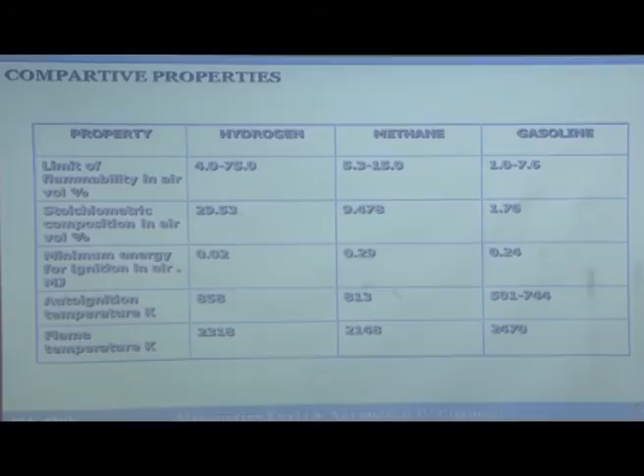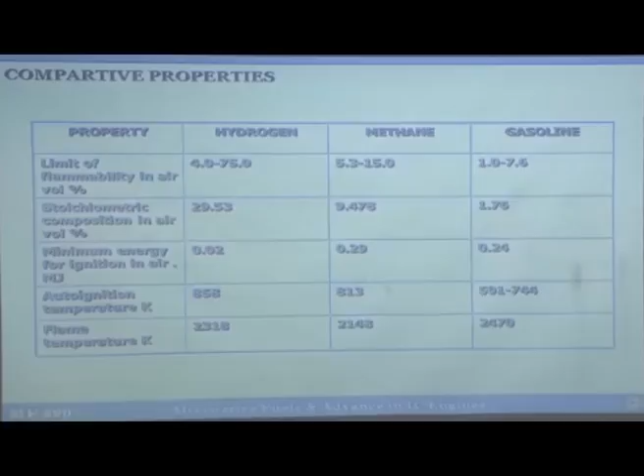Minimum ignition energy required in the air: gasoline is 0.24 millijoule, methane is 0.29 millijoule, and hydrogen is 0.02 millijoule. That means hydrogen, even if there is a hot spot available in the engine such as an electrode, that will start combustion even before you apply the spark. This leads to a lot of knocking in the engine - hydrogen engines knock, and uncontrolled combustion takes place. So you have to figure out safe technology to avoid misfire in the engine.

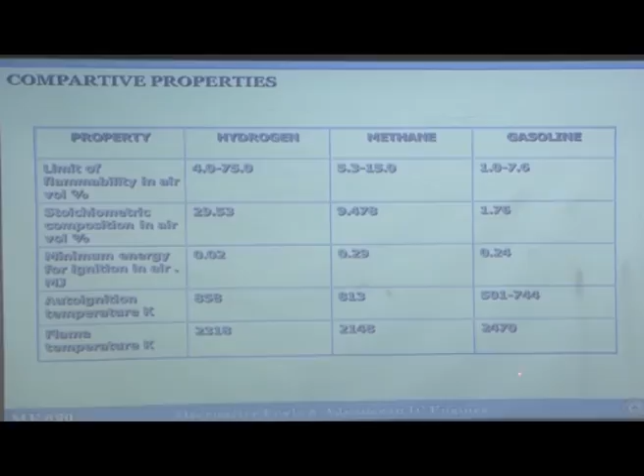Auto ignition temperature: you can see this is the auto ignition temperature for gasoline, which can be auto ignited by compression, but auto ignition temperature is much higher in hydrogen and methane. When auto ignition temperature is higher, it is considered a safer fuel - unless there is an ignition source, it will not ignite just by compression. Flame temperatures are almost similar for all these fuels.

I think I am pretty much done with the hydrogen part. There are few other things, but these are more related to policies and how India should go about it. As far as the technology part is concerned, I think we have learnt how hydrogen is going to play out. Thank you.